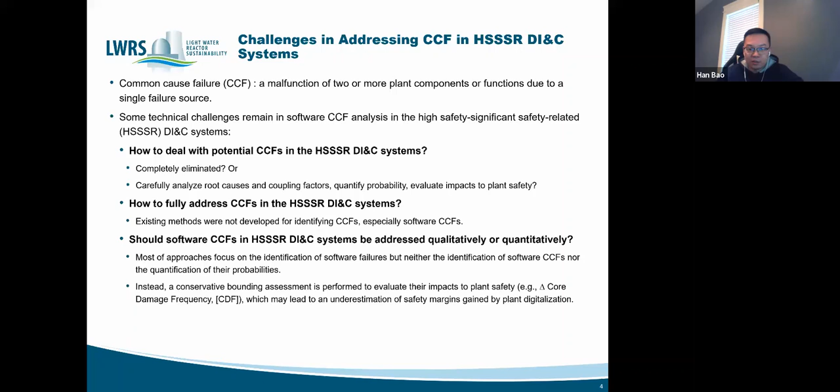The third challenge is whether software common cause failures in digital I&C systems should be addressed qualitatively or quantitatively. Most existing approaches focus on the identification of software failures, but neither the identification of software common cause failures nor the quantification of their probabilities.

Instead, the current choice is to perform a conservative bounding assessment to evaluate their impacts to plant safety, for example, the change of core damage frequency. So the software common cause failure probabilities are assumed to be 0 or 1 for the risk importance analysis, which may underestimate the safety margins increased in this plant digitalization process.

That is why quantitatively estimating the risks of potential common cause failures is very important, because it can provide more risk information to ensure digital I&C designs are cost effective. Therefore, there is a need to develop an integrated risk assessment strategy, including both qualitative hazard analysis and quantitative reliability and consequence analysis, to fully address these software common cause failures in these high safety-significant, safety-related digital I&C systems.

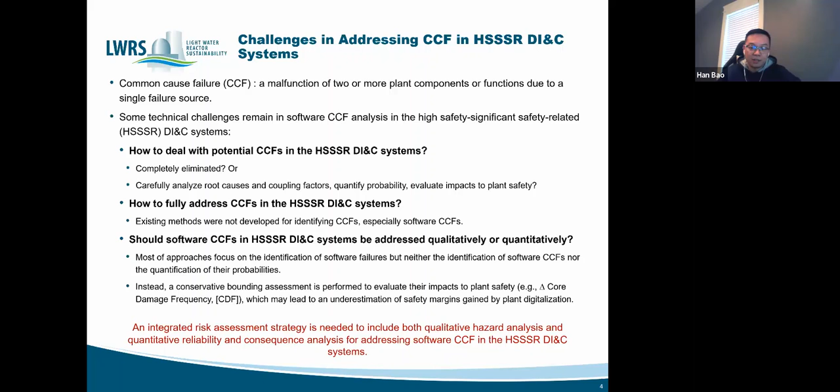The goals of the RISA efforts on digital I&C risk assessment include providing a best-estimate, risk-informed capability to estimate the safety margin obtained from plant digitalization, developing an advanced risk assessment strategy to support the transition from analog to digital technologies, assuring the long-term safety and reliability of vital safety-related digital I&C systems, and reducing uncertainty in costs and supporting integration of digital I&C systems in the plant.

The strategy or technology we developed in this project is called Integrated Risk Assessment for Digital I&C Systems, or IRADIC. It includes two phases: risk analysis and risk evaluation. Risk analysis aims to identify potential failures of digital-based systems, estimate their failure probabilities, and analyze relevant consequences. The results from the risk analysis will then be compared with specific risk acceptance criteria in the risk evaluation stage.

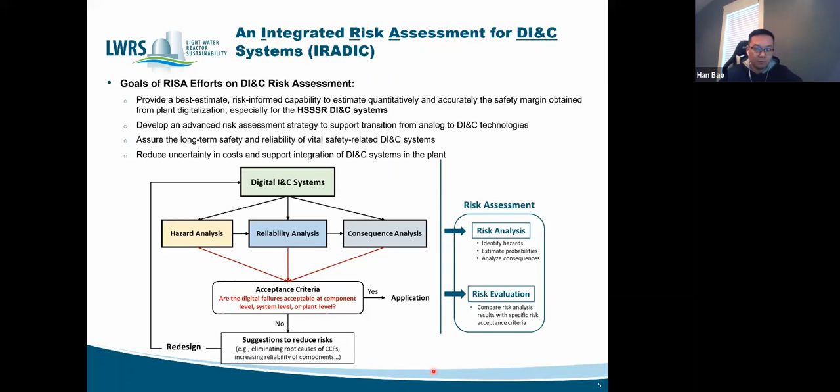IRADIC also aims to provide a modularized platform for I&C designers, software developers, plant engineers, and risk analysts to efficiently predict and prevent risk by identifying the crucial failure modes, quantify the reliability of the digital I&C systems, and evaluate their impacts.

In IRADIC, a redundancy-guided system theoretic hazard analysis method was developed to address both hardware failures and software failures, individual failures and common cause failures. It's called RESHA. RESHA can also qualitatively analyze the effects of these failures on system availability. More details about RESHA will be provided in the following slides.

The second part of IRADIC is a multi-scale reliability analysis, with tasks of quantifying the probability of failures identified from the hazard analysis, and also the failure of the entire digital I&C systems.

In IRADIC, two methods have been developed for software reliability analysis in different data conditions. One is called BAHAMAS, the Bayesian and HRA-aided method for reliability analysis of software. It was developed for the data-limited condition, especially for the very early design stage of the software.

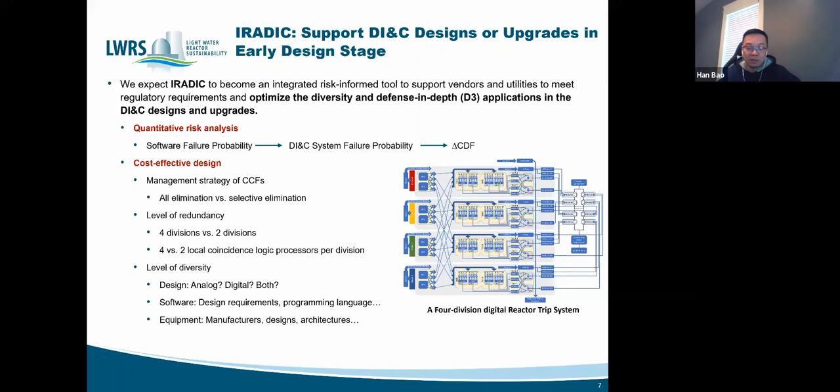The NRC BTP 7-19 clarifies the requirements for acceptable methods for addressing common cause failures, including identifying common cause failures, reducing common cause failure likelihood, and evaluating common cause failure impacts in design-basis events. The capability of IRADIC in hazard, reliability, and consequence analysis matches well with these requirements.

Next, I will briefly introduce these three parts of IRADIC: hazard analysis, reliability analysis, and consequence analysis.

The first part is hazard analysis. For IRADIC, we developed an approach called redundancy-guided systems theoretic hazard analysis, or RESHA. RESHA incorporates the concepts of combining FTA and STPA from HAZCADS. FTA means fault tree analysis, a traditional PRA method. STPA means systems theoretic process analysis, a method developed by MIT, which is also a hazard analysis method.

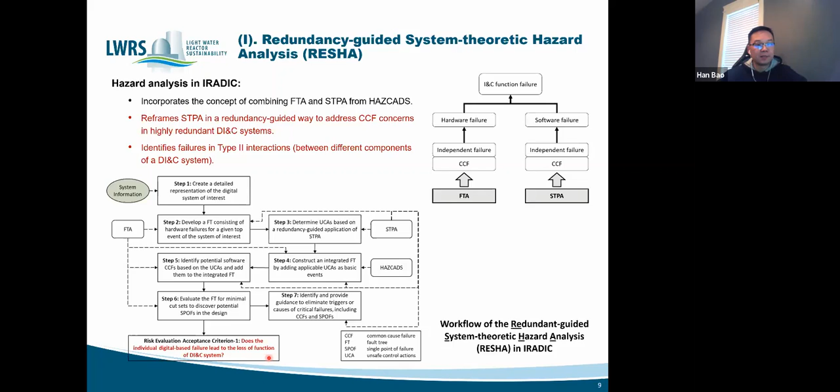In the following slides, I will provide more information about the method and also a case study. Step 1 is to create a detailed representation of the system of interest. The case study shown here is a 4-division digital reactor trip system; the 4 divisions perform redundant reactor trip functions. In this step, we specify the boundary and scope of the system, detail the hardware and software applied, and map out the system.

For example, the first part of the reactor trip system is called the reactor protection system. After that, there is also manual control from the main control room and remote shutdown room, coming from the operator. A diverse protection system, called DPS, is also introduced here. So this reactor trip system includes manual control and automated control by RPS, the reactor protection system, as well as control from the diverse protection system—it's a very redundant and diverse system.

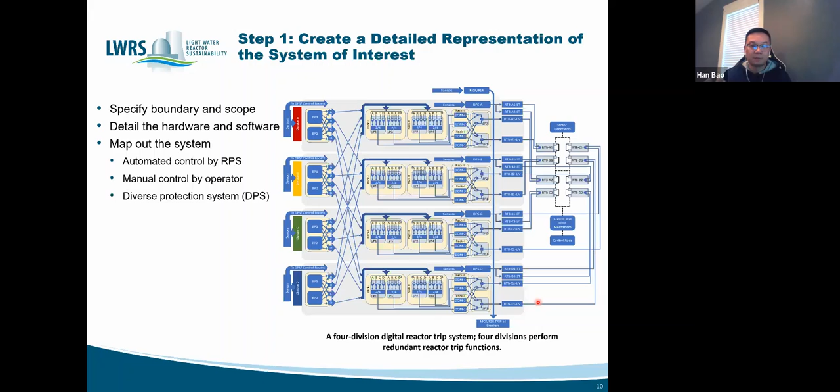Step two is applied to build up a fault tree which only includes hardware failures. First, the top event of interest should be defined in different accident scenarios. For example, the failure of the reactor trip system, or the reactor trip system sending spurious trip signals to the reactor trip breakers.

Step three is to determine the unsafe control actions by applying STPA. This is a key step of RESHA.

For example, here is a 4-division RTS. It has different levels of redundancy: the multiple reactor trip breakers which control the control rods, the different LCL processors in the LCL cabinet, and also different bistable processors, BP1, BP2, in different divisions. So we can see that this system has different levels of redundancy.

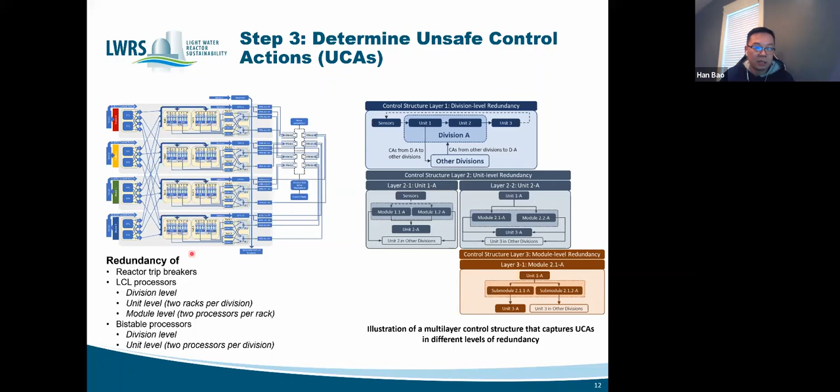Step 4 and 5 is to construct an integrated fault tree by adding the applicable unsafe control actions as basic events into the fault tree, which only has hardware failures.

Type B is the control action is given but it's not needed. For example, the reactor trip system just sent a spurious signal to trip the reactor, but actually it's not needed. Type C is the control action is given too early, too late, or in the wrong order. Type D is the control action is applied too long or stopped too soon.

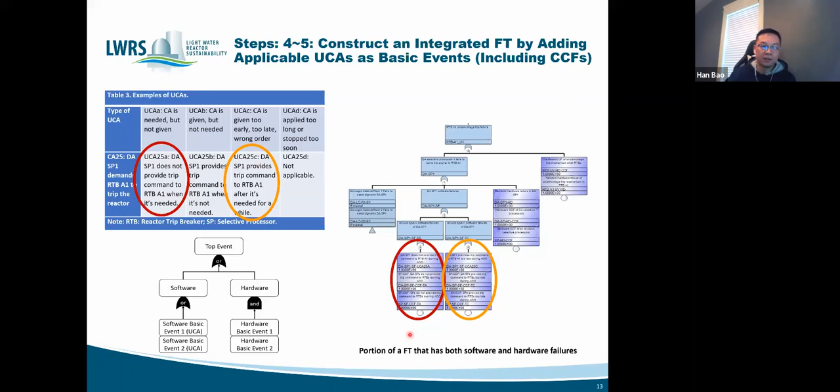Step 6 is to determine the common cause failures that may lead to the single points of failure in the design.

In the previous steps, both hardware failures and software failures, and also their common cause failures, can be identified. Here we only list 13 common cause failures that may lead to the failure of the reactor protection system. These common cause failures are at the system level, which are suggested to be fixed in the design stage because they are considered as potential single points of failure. They can just lead to the failure of the reactor protection system.

Of course, there are some other common cause failures which are not single points of failure. That's why we need the quantitative reliability analysis to determine their impacts to the safety of the system or the plant safety.

This table shows the different cut sets for different systems. For example, if we take the full reactor trip system model into consideration, there is no first order cut set. If we do not consider the manual control from the operator or the main control room, there is still no first order cut set, but there are 52 second order cut sets.

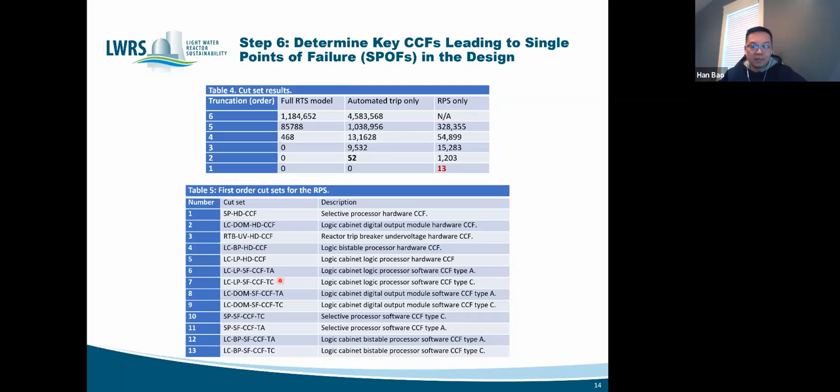If we only consider the reactor protection system, there are 13 first order cut sets. So that's how we get Table 5. The next step is to identify the causal factors of the critical failures in the design.

The mechanism of hardware common cause failures has been studied for decades. So the challenge here is to identify the cause factors of these software common cause failures.

There are two categories of unsafe control actions of a digital controller, or software failures. Category 1 is the inner software failure, including software design defects and software implementation failures. Category 2 is the incorrect feedback or inputs to the digital controller, meaning unsafe information flows from the dependent intermediate modules.

According to the difference in functionality, there are normally two types of digital modules in the DI&C systems: for example, the digital controllers or the intermediate digital modules. The physical element of the digital controller includes a central processing unit along with its associated microcode, memory, and the I&C program. A digital controller may be connected to other controllers or intermediate modules, such as sensors, actuators, or input and output modules.

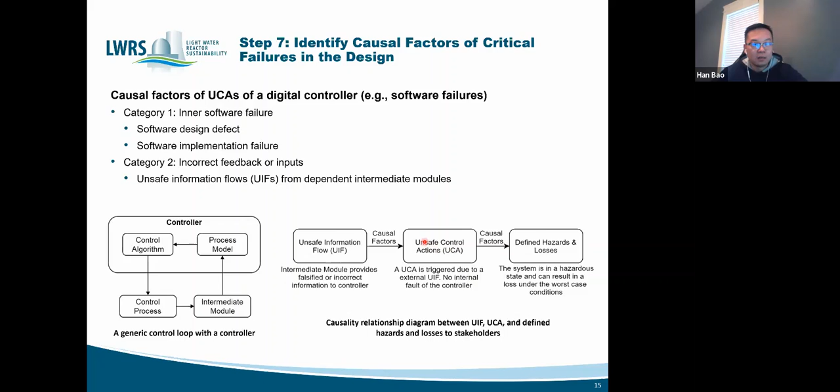This slide shows the information flow of RESHA. The key outputs of RESHA include an integrated fault tree, which is unquantified because we don't know the probability of the basic events of this fault tree, and also the single points of failure and their cause factors. These single points of failure may need to be fixed before this system is applied for different reactors, for different nuclear power plants. Another output of RESHA is a hazard defense plan.

Based on this information flow, step 1 of RESHA obtains a system sketch, and step 2 builds up a hardware fault tree. Step 3 identifies the different UCAs and builds up a multi-layer control structure. Step 4 integrates the hardware failures and unsafe control actions and builds up an integrated fault tree.

Step 5 identifies the different common cause failures based on the levels of redundancy and levels of diversity. Step 6 identifies the different single points of failure and calculates the minimal cut sets. Step 7 identifies the different causes of the common cause failures.

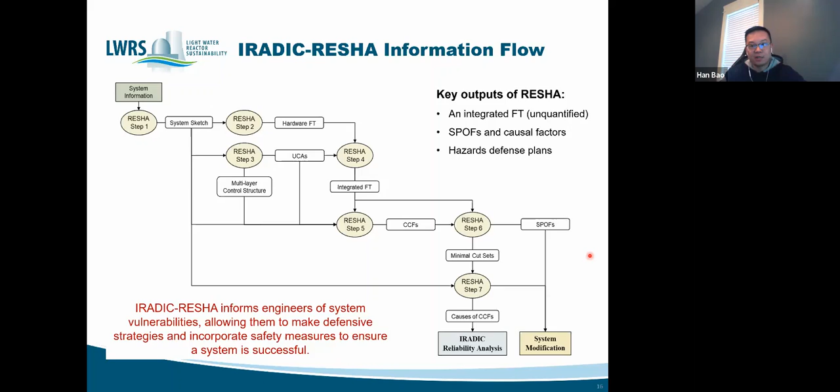That's the hazard analysis of IRADIC, and the next step is the multi-scale quantitative reliability analysis of IRADIC. It's called multi-scale because it includes both small-scale software reliability analysis and large-scale DI&C system reliability analysis. The goal is to estimate the DI&C system reliability by calculating the integrated fault tree of the DI&C systems obtained in the previous hazard analysis, and then provide inputs for the following consequence analysis.

This slide illustrates the framework of IRADIC multi-scale reliability analysis. The first step is the adequate collection and evaluation of design and requirements documentation. The software design information should be collected, including software implementation and testing information, the software design document with detailed design information, and the software requirement formulation with high-level design information.

All of this design information will be collected and evaluated to see whether it is sufficient for a detailed software reliability analysis, and at the same time the RESHA results will be provided for different purposes. If the answer is no, it means the available data is very limited. For this condition, we developed a method called Bahamas in IRADIC. Bahamas applies the Bayesian belief network and HRA method to quantify the failure probability of the software.

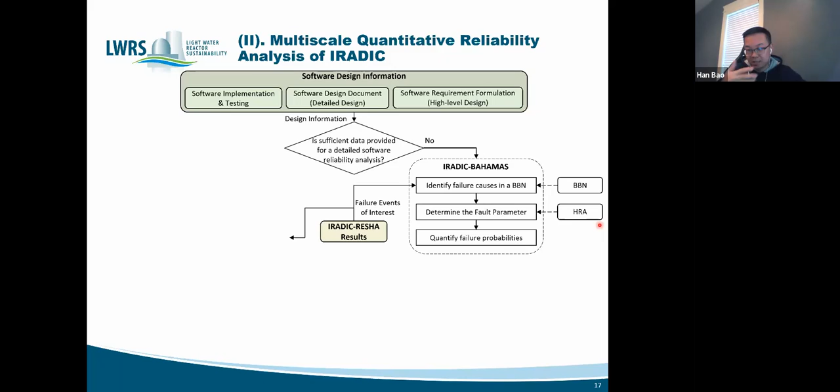Normally, Bahamas can be applied in the early design stage of software or digital I&C systems, or when the data is very limited, because Bahamas just assumes that the root causes of software failures are the human errors during the software development lifecycle. So in that way, we do not need much data for the quantification work.

We can just apply HRA to quantify the human faults or human errors during the specific software development lifecycle, and use that information to quantify the software failure probabilities. So that's for the data-limited condition. But if the data is sufficient, we are developing another method called ORCAS to provide a more accurate estimation of the software reliability or failure probabilities. ORCAS applies different testing methods, orthogonal defect classification, to connect the software defect and the unsafe control actions identified from the hazard analysis.

Then we use software reliability growth modeling to quantify their failure probabilities. After quantifying the failure probabilities, common cause failure modeling and estimation will be performed to quantify the probability of common cause failures and the probability of individual failures, because the software failure probability calculated by Bahamas and ORCAS is just the total failure probability of the software, which can be considered as a summation of individual failure probabilities and CCF probabilities. In this step, a modified beta factor model is applied.

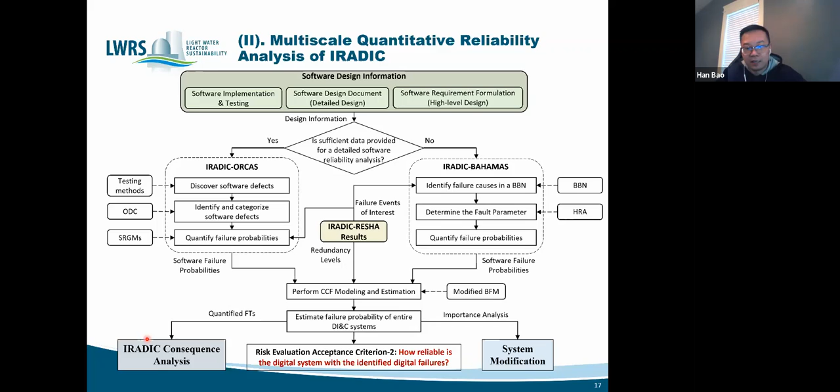At the same time, the quantified fault tree will be used as an input for the following IRADIC consequence analysis to evaluate the impact of the software failures to the plant safety.

This slide compares Bahamas and ORCAS, the two methods we developed in IRADIC for quantitative software reliability analysis. Bahamas is called Bayesian and HRA-aided method for the reliability analysis of software. It was developed for conditions with very limited testing or operational data, or for reliability estimation of software in a very early design stage, which means the data is not sufficient for an accurate estimation of the software failure probability. Bahamas can just provide a very rough estimation of the failure probability to support the redesign of the software and the target DI&C systems. It's very useful when the data is not sufficient or very limited, especially when the design is not mature and there's no testing data.

The second method, ORCAS, is called Orthogonal Defect Classification for assessing software reliability. It's still under development, and it's designed for conditions with sufficient testing and operational data. The goal of ORCAS is to provide a relatively accurate estimation of the software failure probabilities compared with Bahamas.

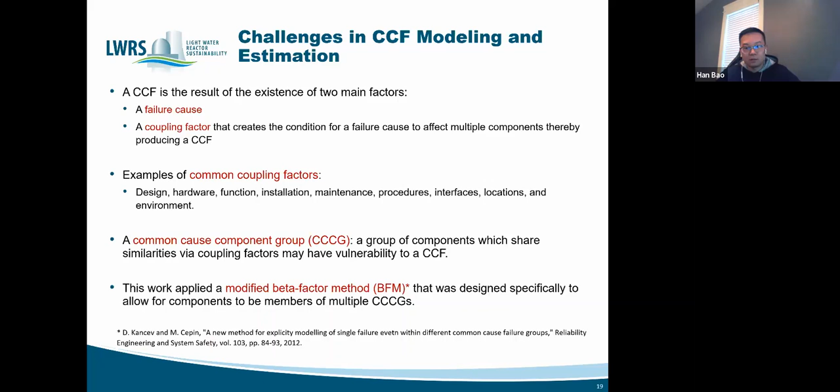This slide introduces what the modified beta factor method is. This model assumes that the total failure probability of a component is a combination of independent failures and dependent failures. Independent failures were defined as individual failures in the previous slides, and the dependent failures can be considered as

CCF failures. So the total dependent failure, or the total CCF failure, consists of the contribution of each CCF failure, as shown in this equation, where each CCF failure is assigned a group beta factor, for example, beta W.

Each group beta represents the contribution of a single CCF failure to the total failure probability. This equation shows the independent failure probability, or CCF failure probability, in terms of each CCF component group beta and total failure probability. The challenge of applying the modified beta factor model, or multi-factor method, is how to estimate the beta factors given a limited data scenario,

because in the past, the estimation of the beta depends on the testing or operational data from the nuclear power plants.

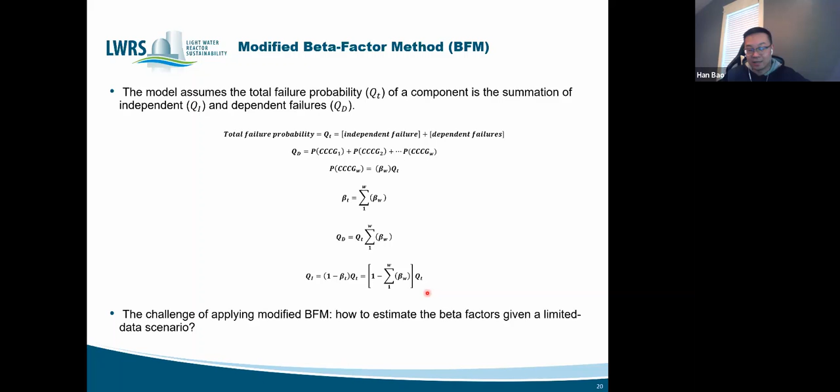To deal with that challenge, in this project, we applied an additive scheme partial beta factor method to estimate the betas. This method was developed by Humphreys and other people in 1987.

In the partial beta factor method, a collection of attributes called subfactors were selected, which are known to contribute to the prevention of CCF failures. In a word, the beta factor can be considered as a summation of these subfactors divided by 50,000. This equation is applied in this work to estimate the beta factors.

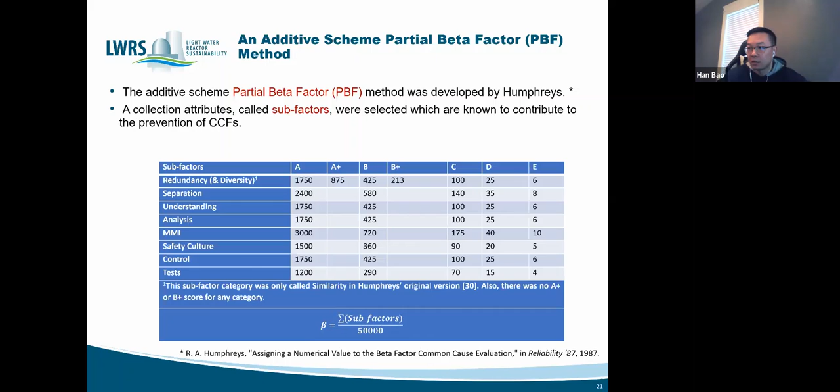I will move fast because the time is almost there. This slide shows the IRADIC CCF modeling process, a formalized process that relies on the modified beta factor method and partial beta factor method, shown here.

This approach relies, the first step of this approach is to identify the CCF groups, assign the CCF component groups, and then define the beta factors using the partial beta method, and then determine whether it's a single CCF group or a multiple CCF group, and then determine the probability of these CCF failures, and then use them for the estimation of the failure probability of the DI&C systems.

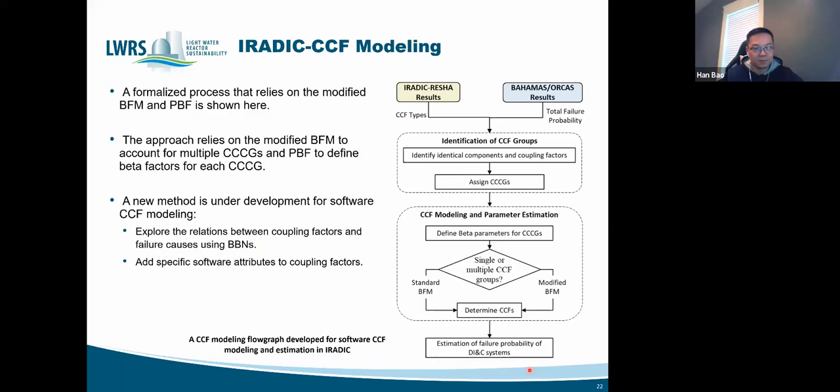That's for the reliability analysis, and the third part is a consequence analysis. So in this work, we just

compare the changes of core damage frequency after adding the integrated fault trees of digital RTS, reactor trip system, and the ESFAS, engineered safety feature actuation system, to a generic PWR event tree model, which is shown here.

This event tree is a generic PWR transient event tree, which also includes the ATWS, anticipated transient without scram, and the loss of seal cooling, and also the small break LOCA and medium break LOCA.

The reactor trip system failure is treated as an initiating event, and the failure of the ESFAS system is treated as an important basic event included in different top events, the fault trees of the top events.

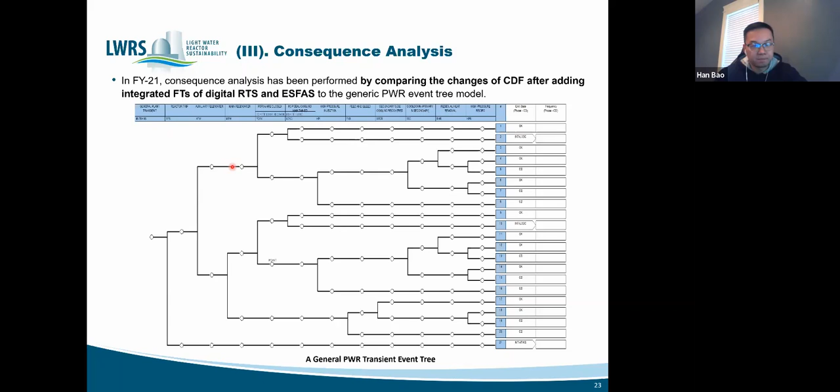This slide compares the original and new fault trees for the reactor trip system. The failure probability of the original fault tree is 4.3 E-6, and the failure probability of the new fault tree is about 1.3 E-6.

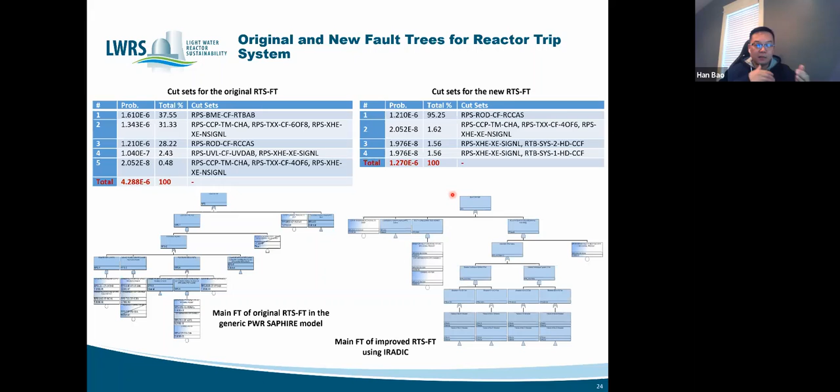The original RTS is just a two-train analog reactor trip system, but the new reactor trip system is a 4-division digital reactor trip system. So we can see that by introducing a digital system for the safety-related DI&C, its failure probability is reduced a lot.

This slide compares the original and the new fault trees for the ESFAS. It's very similar to the comparison of the reactor trip system. The failure probability of the ESFAS is reduced, and accordingly,

some top events with this ESFAS failure inside have also, I mean, their probabilities are also reduced a lot. For example, for the low pressure injection, its failure probability is reduced from 8.4 E-4 to 2.3 E-4.

This slide compares the core damage frequency with different RTS and ESFAS fault trees. By adding the integrated fault trees of the 4-division digital RTS and ESFAS into the PWR model, the safety margin increased by the digitalization is quantitatively estimated.

Results show that the core damage frequencies have been greatly reduced, especially for the transient scenario, with the core damage frequency almost halved. The conclusion here is that using IRADIC technology to deploy advanced digital RTS and ESFAS provides great benefits to plant safety through an increased safety margin for accident management.

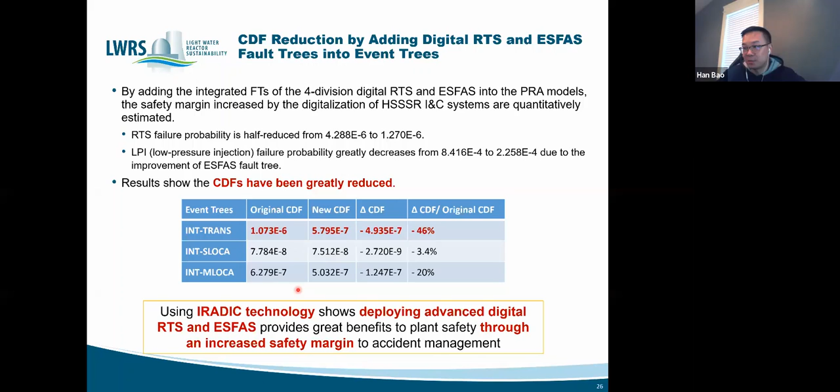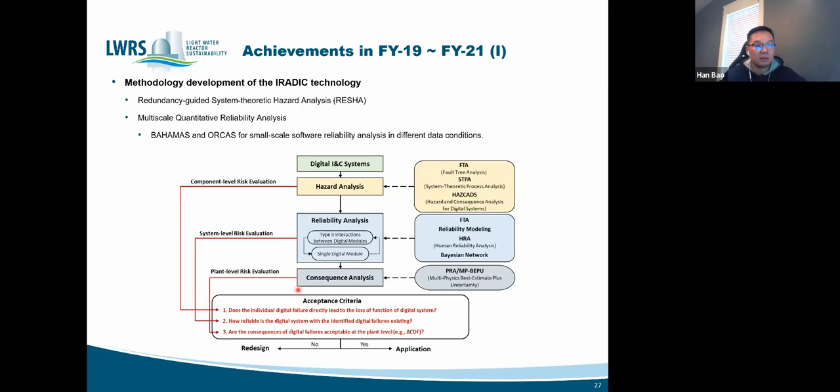Next, the achievements of this project in the past 3 years, including methodology development and case studies applied based on the APR 1400 designs for the reactor trip system and engineered safety features actuation system. We are collaborating with universities, such as the University of Pittsburgh, to develop new CCF modeling methods to estimate software CCF probabilities.

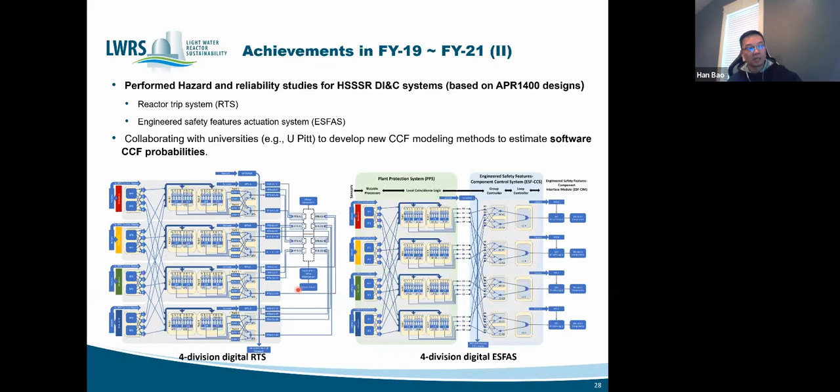We also have collaborations with North Carolina State University to develop a risk assessment framework for AI-guided control system designs. We are also building up capabilities to address cyber vulnerabilities in digital I&C systems and networks. So far, we have 3 journal articles, 3 milestone reports, and some conference papers published.